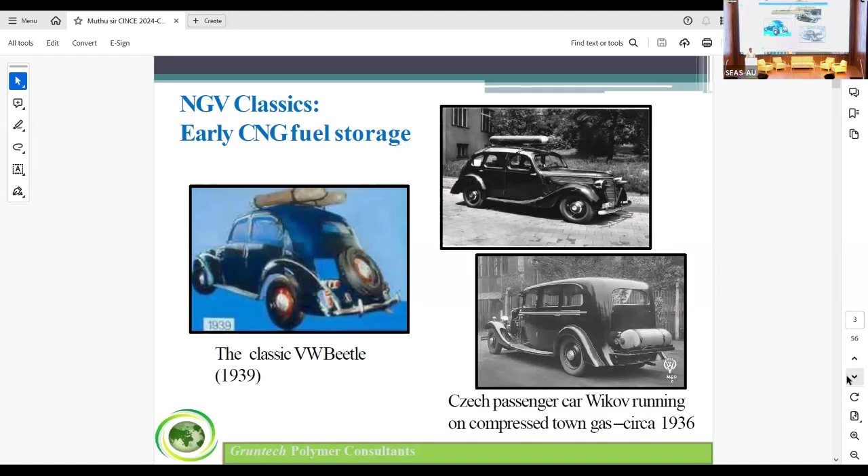So there are 5 types of hydrogen storage, like for LPG, or even for CNG and hydrogen. Type 1 and type 2, you are all aware of. Type 1 is completely metal, a metal body. Type 2 cylinders are metal with a hoop, circumferential wrap on the middle part, with carbon or glass fiber. Type 3 has an aluminum or steel liner based on your design requirements, fully wrapped with carbon fiber, or you can use glass fiber on top of it.

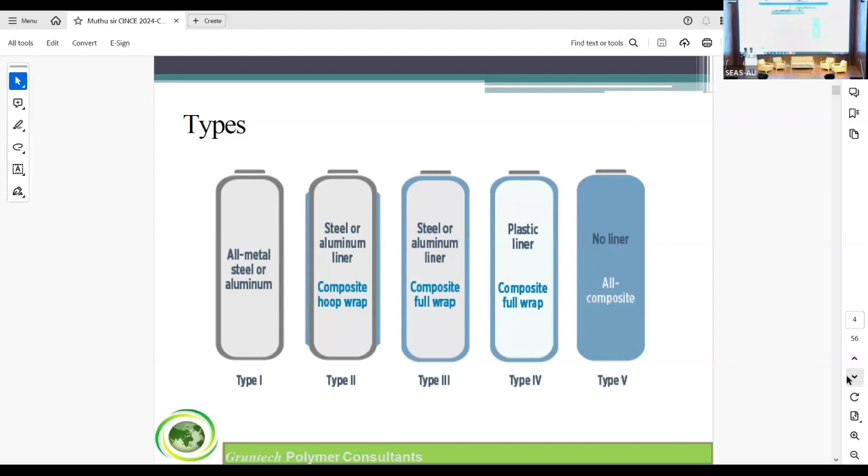Type 4 is a plastic liner. It can be high density polyethylene; at the moment, everybody is using it. Nylon for hydrogen applications. There are other engineering plastics also that can find their way into the type 4 segment in the coming months. The last one is type 5, no liner, all composites. It's in the early stage, only a few prototypes, and it's coming into the market. But as of now, type 3 and type 4 are dominating the composite market in the hydrogen segment.

So carbon fiber. Why carbon fiber? We tried with glass fiber and basalt fiber, but the thickness goes up, the weight goes up, and it does pass the burst test and hydrostatic test, but in fatigue we fail. So that's the reason we moved to carbon fiber. Carbon fiber's main properties you are all well aware of, since you are from the composite industry.

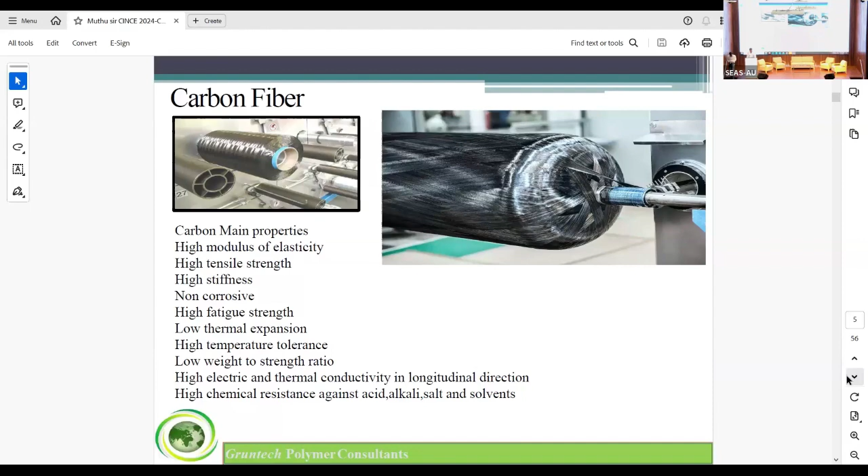High modulus of elasticity, high tensile strength, high stiffness, non-corrosive, high fatigue strength, low thermal expansion, high temperature tolerance, low weight to strength ratio, high electric and thermal conductivity in the longitudinal direction, high chemical resistance against acid, alkali, salt, and solvents. So with carbon fiber, we look at 2 main properties when you choose whether Toray or Hyosung: tensile strength as well as modulus. Toray and Hyosung are leading players.

If you start a project next year, you have to book your orders now itself, because the demand is more but supply is less. From Toray, you have to wait 1.5 to 2 years to get at least 1 ton or 2 tons of carbon fiber minimum. With Hyosung, you can wait 6 to 10 months and get a sizable amount for prototype making.

Leading players in type 4; type 3 is a mix of both. These are the companies leading: NPROXX, Faurecia, Plastic Omnium, Steelhead, Quantum Fuel Systems, Time Technoplast from India, Toyoda Gosei, and for LPG, Supreme, which you can add for LPG cylinders.

So some people use 50% carbon fiber and 50% glass fiber ratios for the winding. Whereas based on the design, some are not able to attain all the test requirements. That is why the majority portion is covered with carbon fiber in type 3 and type 4.

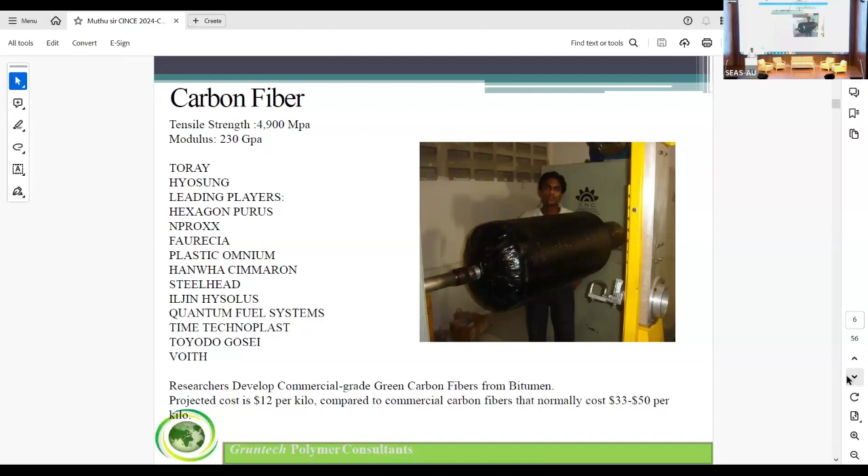These are the tanks we wound, almost 15 years back. So this is a key advantage of composite cylinders: cylinders made of composites have lower weight compared to conventional cylinders. As you know, these cylinders are external corrosion resistant. Still, with certain chemicals you need to be careful. Still there is corrosion taking place for composites, which we discuss in later stages.

Suitable additives can impart very good fire retardant properties in a composite cylinder. It's very, very much needed. Some researchers, some companies straight away go with the market-available epoxy resins. They add whatever flame retardants are available in the market, and then they're not able to get a consistent performance on the fatigue test and the bonfire test.

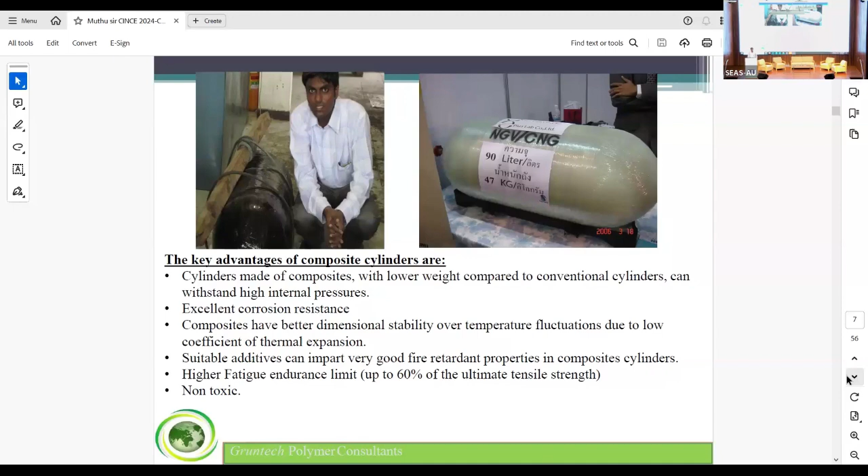So higher fatigue endurance limit, up to 60% of ultimate strength. It's non-toxic. Weight ratio: Type 1 is 1.2 to 1.5 kg per liter. Type 2, 0.7 to 1.4 kg per liter. Type 3, 0.3 to 0.4, based on whether you add glass fibers. If you use 90% carbon fiber and, for better impact strength, you add a top layer of glass fiber, for that the weight varies.

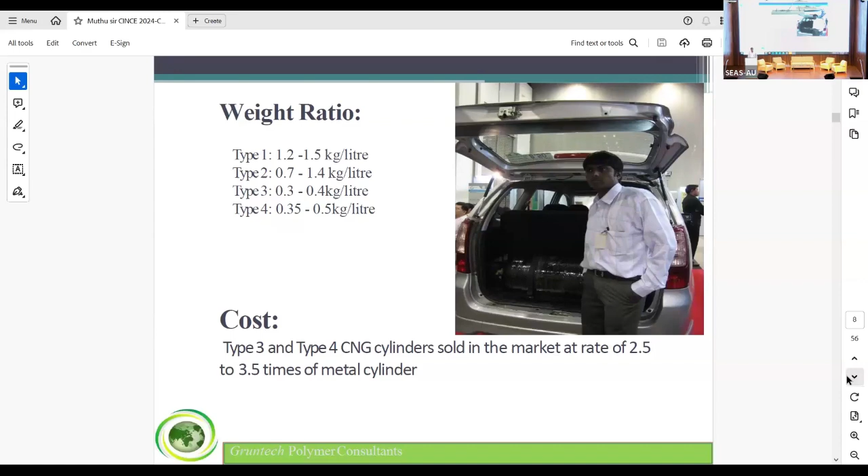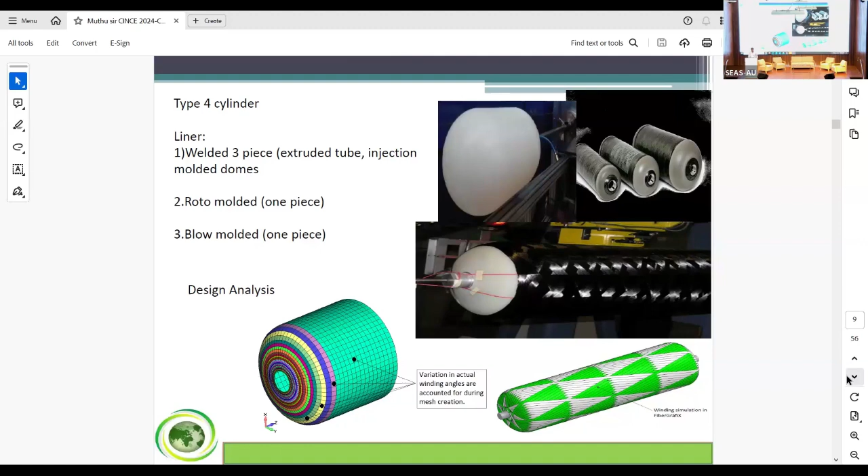Generally for the liner, there are 3 types. Straight away we can go with blow molded or roto molded, a one-piece single molded liner. Otherwise, welded three-piece: one extruded tube and injection molded domes. That also can be used; Hexagon started using that. For now, for hydrogen, the majority of companies are going for blow molded one-piece liners, mostly polyamide nylon.

When you look at the hydrogen storage system, you need to have very good machines. Before that, you need to decide which resin system you're going to use and what additives you're going to add. If you want nanomaterials, you can use that also. It's based on your design. So you have to be pretty strong in the design before placing orders for the machines and other supporting equipment, fibers and resins.

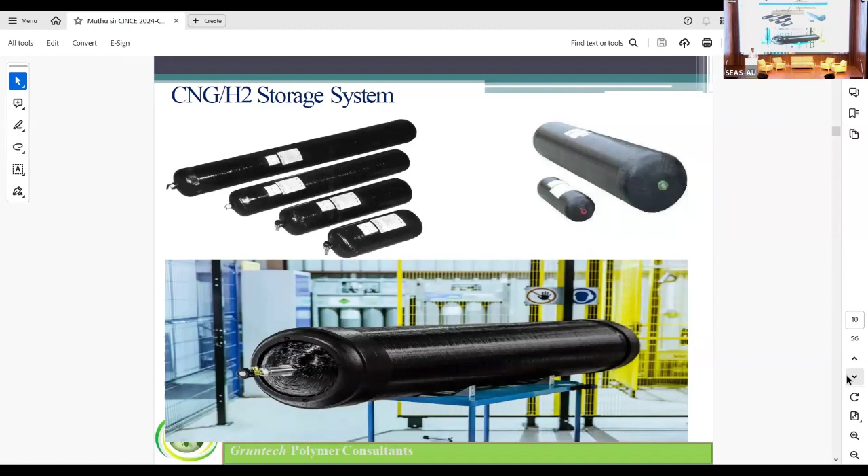So there are metal cylinder accidents. A wrong component fitted, even to good cylinders. One technician asked me, shall I put an LPG kit valve on the CNG? Even in one of our trials in Thailand, our technician fitted the valve too tightly, so the pressure release device didn't work when we did a bonfire test. It burst on the other side.

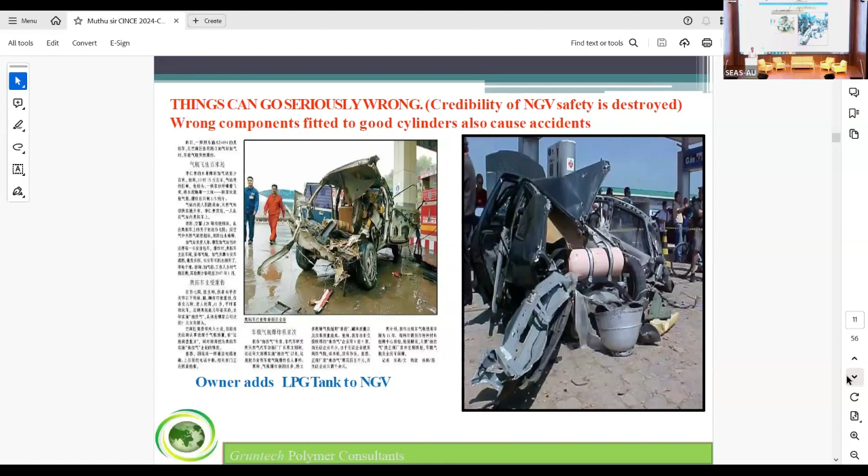That was in front of all the scientists and Thai authorities. We had done a lot of tests, and then we failed it. Then again, with the help of Thai army personnel, we did the bonfire and bullet penetration test and we passed it. So failure doesn't mean anything bad; you are learning and providing better solutions, a better product to the market.

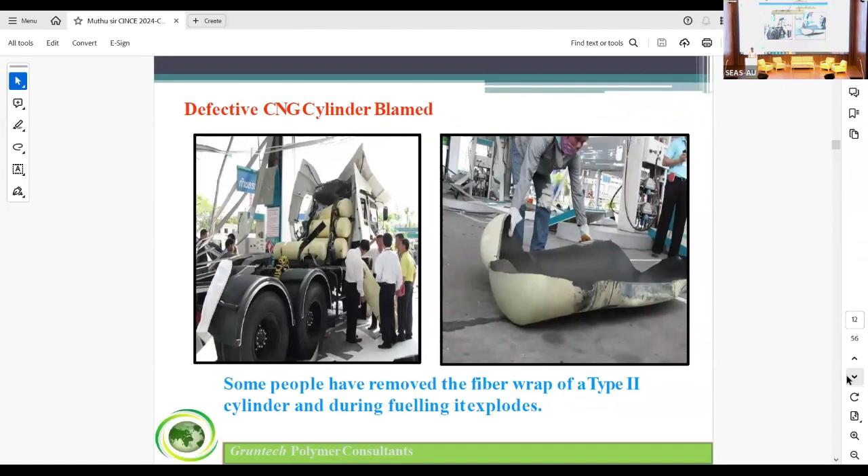Some people, I said, removed the fiber wrap. Even with Type 2, they removed the middle portion; some portions peeled off, so they removed them and used it. It will not last in the long run. With cylinders, whether metal or composite, the first couple of years you will not have any issues at all, because the design and consistency will be there. But after a couple of years it shows its true color.

So your design has to keep in mind that your composite cylinder is going to work for 20 years. Based on that, you have to work. You have to add UV protection. So what will happen with UV?

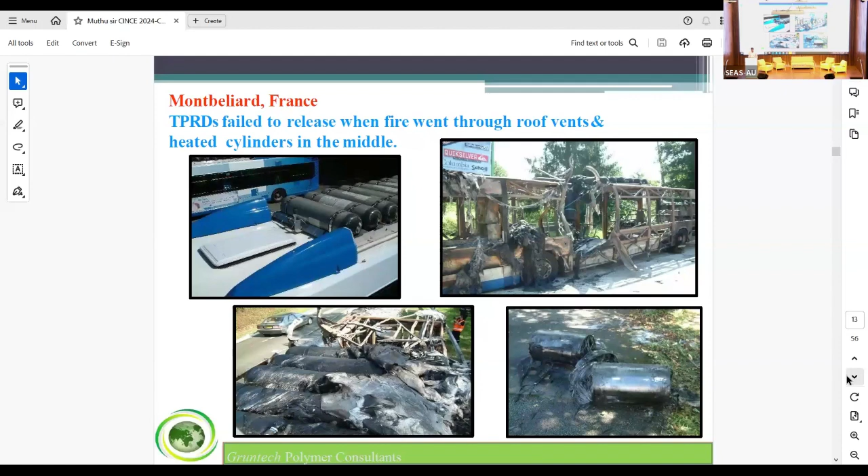So what you have to add are UV additives, flame retardants. So all the other parameters in additives, while selecting the additives, you have to consider.

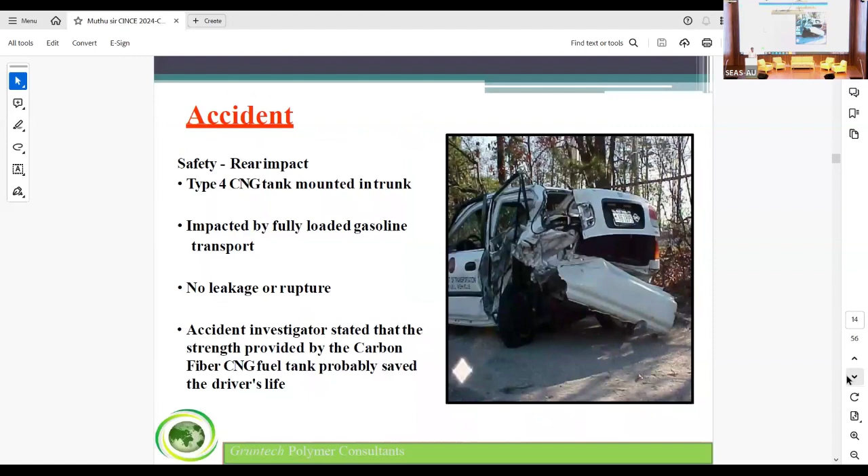Accident: the CNG tanks in the accident are mounted in the trunk. So fully no leakage or rupture. Accident investigators stated that the strength provided by the carbon fiber CNG tank probably saved the driver's life. So use and consumption of composite type 4 cylinders.

So the plastic, some people say, plastic permeation. Permeation, all the materials do have permeation. There is a limit for all the permeation. If your cylinder liner passed that permeation level, you don't have to worry about that for approvals and other compliance.

Plastic material on permeation. Like 10 years back they said composite is not for Indian roads, uneven roads, so only type 3 will work out. Now you can see type 4 is accepted on Indian roads. Confusion over type 3, type 4, both are good. I'm not saying metal is bad, type 3 is bad or type 4. Each one has its own advantages and disadvantages.

If you're using it for a car, you can use type 3, type 4. If you go for longer, carrying the transportation gases to mother stations to daughter stations, the distribution network, if you're using long storage systems, type 4 is more advantageous.

And the properties of composite are not well known. Only after LPG cylinders came to the Indian market, people started saying okay, we can go with LPG itself. We are seeing it's a good result. So type 4 for CNG and hydrogen will be accepted by the people. Already type 4 is accepted, but since the topic is on hydrogen, I want to make sure what is happening at the LPG and CNG level. If you understand that, then only the hydrogen sector.

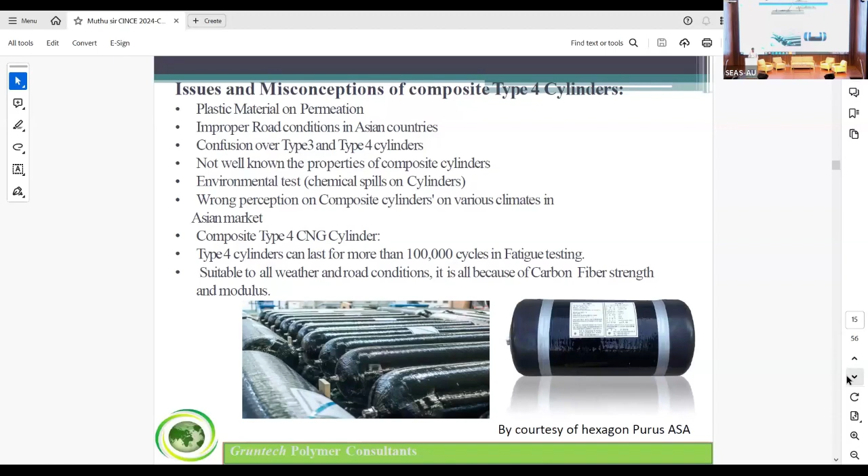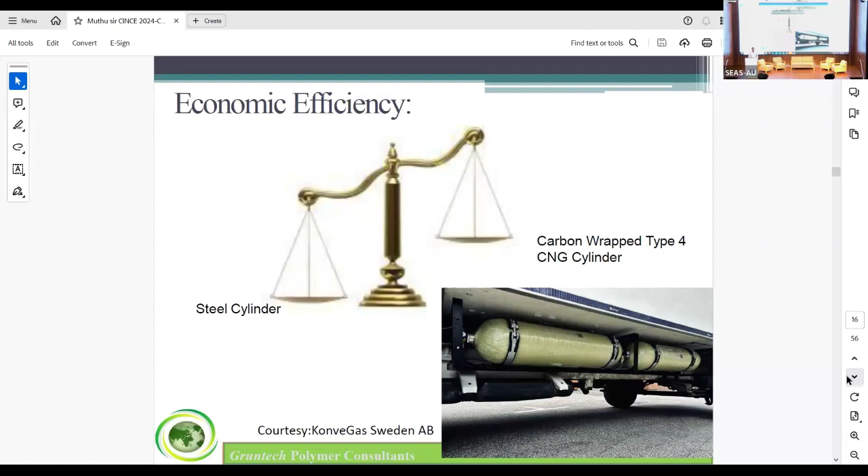So economic efficiency: this is Sweden-based cylinders, they use glass fiber. For CNG application, you can use glass fiber on top of it. If you use fully wrapped glass fiber, it will also work out. But in the fatigue test, like 45,000 cycles, you need to pass. Normally type 4 goes more than 1 lakh cycles. So even 20, 25, 30 years, the performance will be there from type 4. It has been accepted in aviation and maritime.

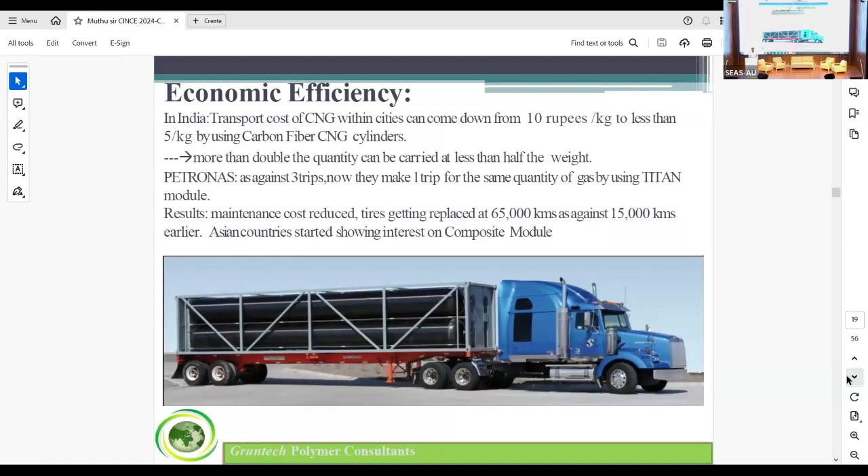This is a huge Titan tank from Hexagon Purus. In India, transport cost of CNG within cities can come down from 10 rupees per kg to less than 5 by using carbon fiber CNG tanks. More than double the quantity can be carried at less than half the weight. Petronas in Malaysia, as against 3 trips now, make one trip for the same quantity of gas using the Titan module, compared to metal cylinders. As a result, Asian countries have started showing interest in composites.

In a bus, a steel tank is 1000 kg, Type 4 is 300 kg; you can see the difference, 70% with carbon fiber Type 4 cylinders. Some people use helical winding with carbon fiber and circumferential winding with glass fiber, then the weight goes up, and you should not compare that data with this data. I'm talking about carbon fiber tanks here, not glass fiber tanks.

To deliver a customer 1 kg of CNG, the steel trailer must also deliver 6.6 kg of steel, whereas in composite it comes to 1.47 kg only. To make a hydrogen storage tank, approximately, it goes from 9.5 to 12 kg of carbon fiber per 1 kg holding. To have 1 kg of hydrogen storage in your tank, you need at least 10 kg of carbon fiber.

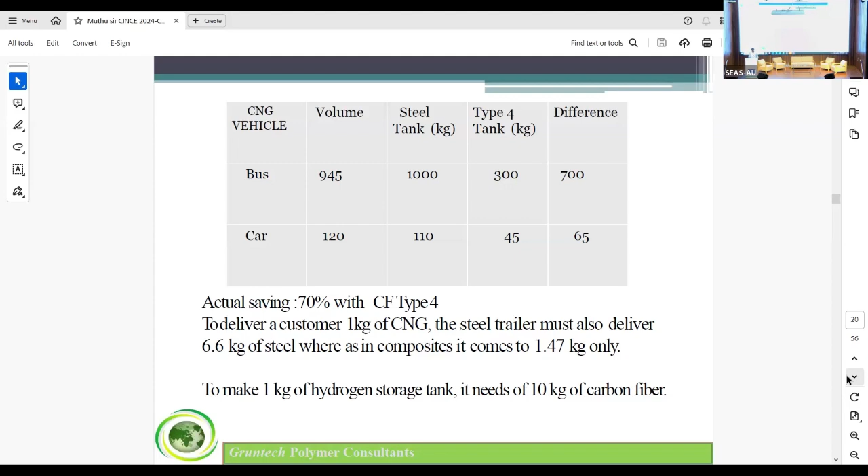In North America, 90% of buses run on Hexagon Composites Type 4 cylinders. How Hexagon started: they started with LPG, succeeded in the North American and European markets, and then started penetrating the Asian market.

Like 20 years back itself, they approached Ashok Leyland. During that time, when we had a meeting with the Indian players, I met the team over there. For this kind of market penetration, you need a very good marketing team. You may have very good technology, very good machinery, a very good product in your company, but if you're not able to take it to the OEMs, to the government tenders, to the various market segments... I know a couple of companies that still have very good, world-class tanks, but they are not able to penetrate into the market.

You need to spend a lot of money on marketing, by having regular follow-up meetings with government officials and OEMs, and then taking part in expos. You need to spread that. You are not only doing passenger cars; even distribution cylinders, trailers, you need to build up one by one, continuously. Then only you can stand in the market. Investing a couple of crores, making one tank, and then waiting for the orders, nothing will come.

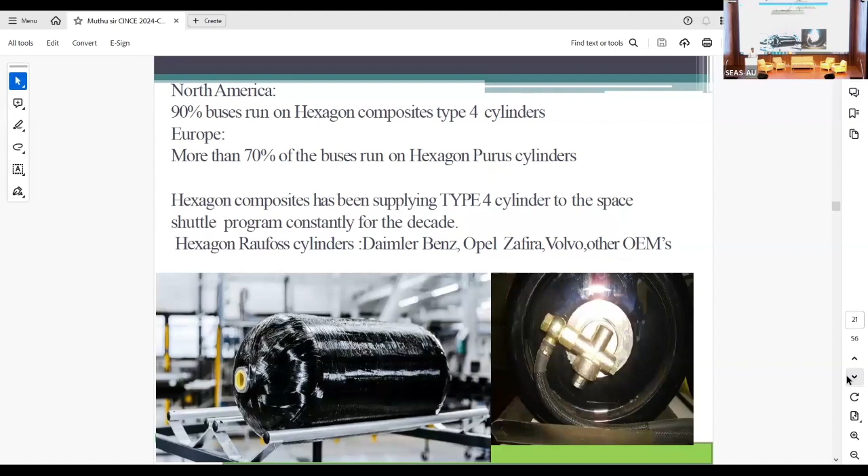They're going with prototype development. They are dominating the market as of now, not only LPG, CNG. They went first into Malaysia, Vietnam, Thailand, Kazakhstan, India, and China, and they're already in service in all these countries. These are Titan. You can see the 10,000 cubic meter capacity of CNG. Titan 5 Magnum, 13,250 cubic meters of CNG at 3,600 PSI. So you can imagine, we start with 60 liters, then 120 liters, and then 180 or 250. You need to have proper planning before entering this segment.

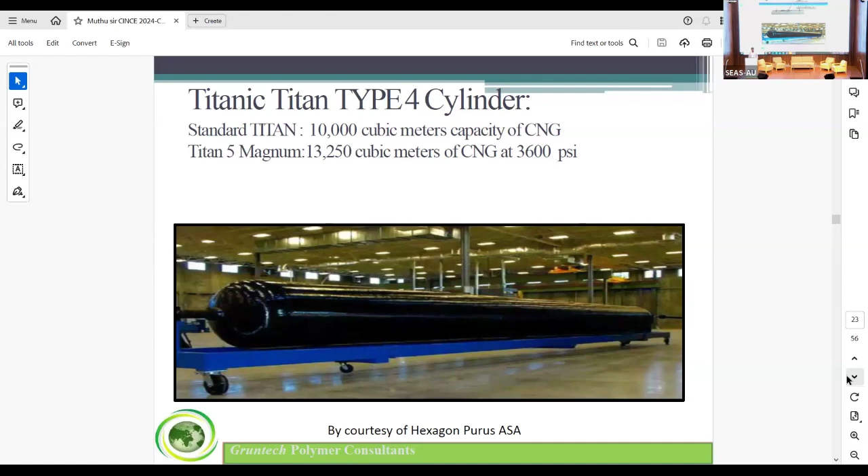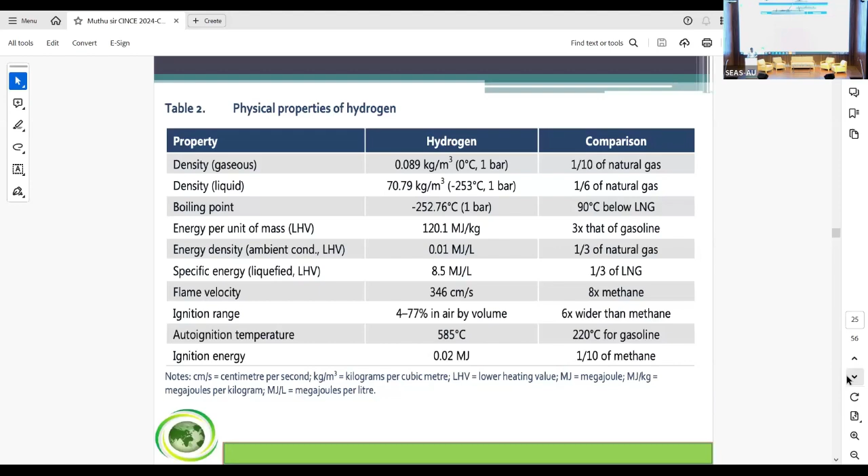Now coming to hydrogen. What is hydrogen? You can see the physical properties of hydrogen: density, boiling point, and the flame velocity, which is very important, 8 times methane. You will see the comparison. Then auto ignition temperature, and ignition range of 4 to 77%. That is a very important criterion to keep in mind. On permeation leakage, a very important point I want to share with you: hydrogen is the lightest element. It is highly volatile, escapes immediately and disperses rapidly before it forms a flammable concentration.

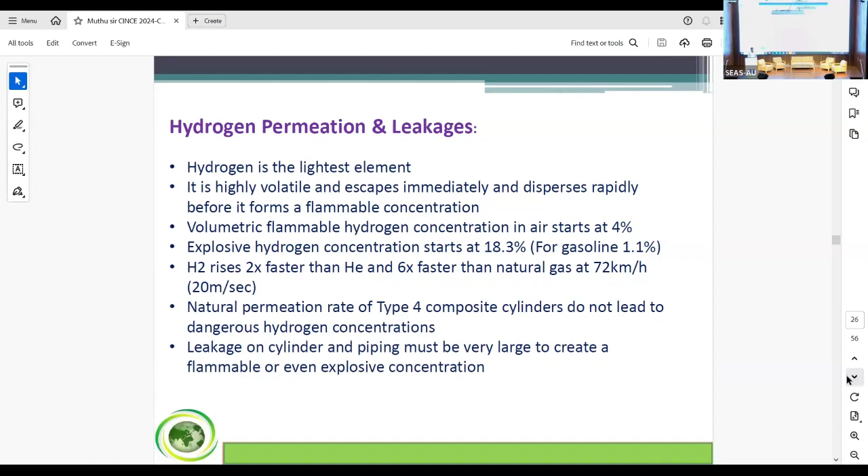Volumetric flammable hydrogen concentration in air starts at 4%. Explosive hydrogen concentration starts at 18.3%; for gasoline, 1.1%. Hydrogen rises 2 times faster than helium and 6 times faster than natural gas, at 72 kilometers per hour, 20 meters per second. You can imagine how hydrogen behaves and reacts to flame. Natural permeation of composite cylinders does not lead to dangerous hydrogen concentration. Leakage on the cylinder and piping must be very large to create a flammable or even explosive concentration.

For hydrogen, at the moment, there is blue and gray, and brown, as you can see. Green is at the investment stage. Germany is making it, and China has started making it. These are already established, with 600 tons per year facilities now, and it goes higher. India has already announced projects, and they're in the pipeline, so you can expect a lot. White and pink are electrolysis and nuclear. We only have a market in gray, and this is from natural gas resources.

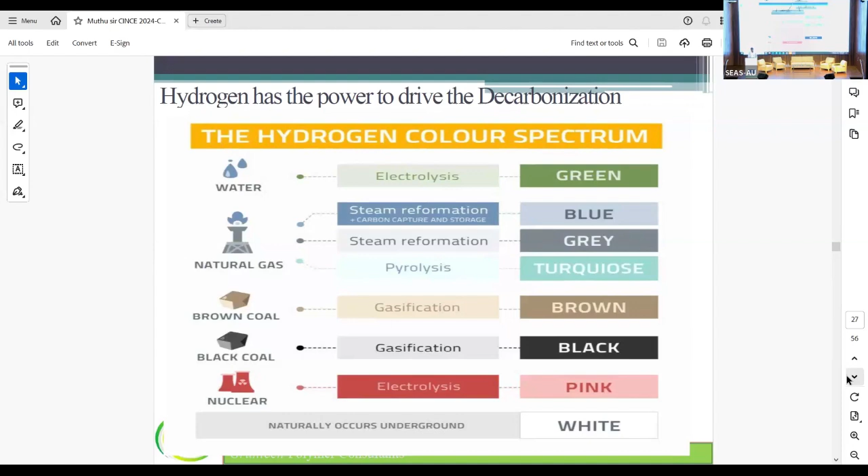And brown, green is under pipeline. So a lot of projects are taking place in green. So green energy, hydrogen. So more in applications-wise, chemical, fertilizer, oil, steel, cement industry. So that we can cover in the next slides.

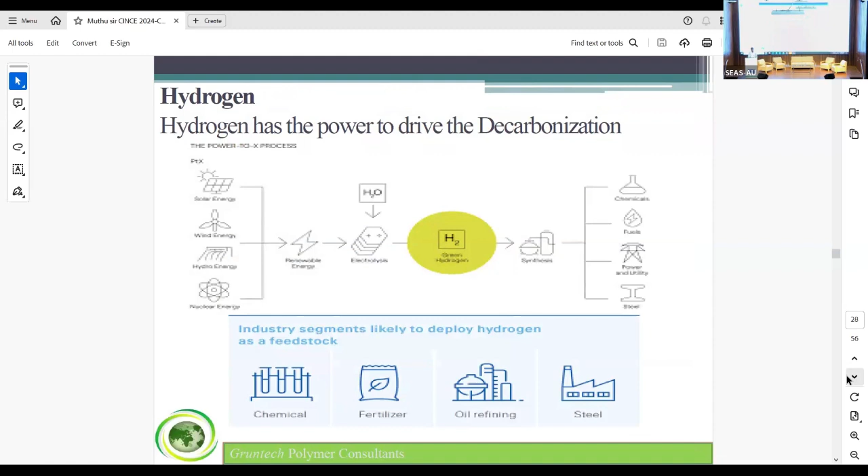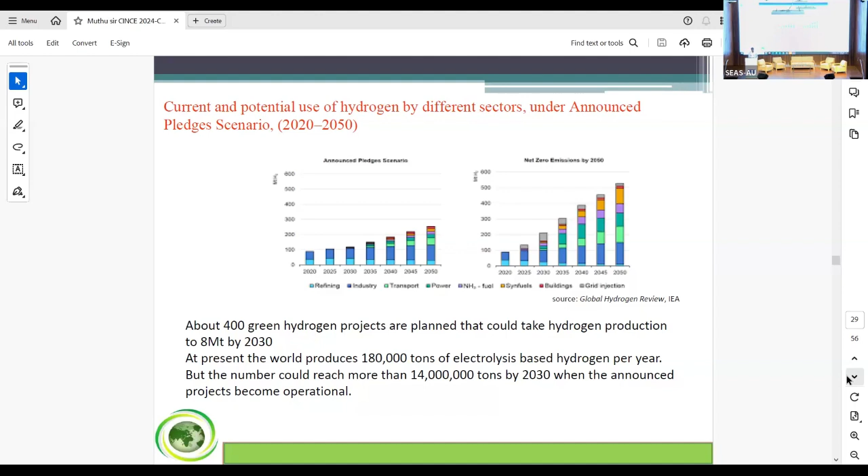I think it may go higher also. This figure is just the present scenario. We assume this one. It will reach beyond. It will surpass the number. So if all the announced projects and undergoing projects take place, it will be 14 million tons.

So hydrogen studies suggest that long-haul trucks and buses have greater potential for fuel cells compared to other modes of transport. 25 major auto manufacturers are currently deploying fuel cell electric vehicles in target markets such as the US, mainly California, Germany, UK, and Scandinavian countries, Norway and Sweden. They're dominating the market, and Japan.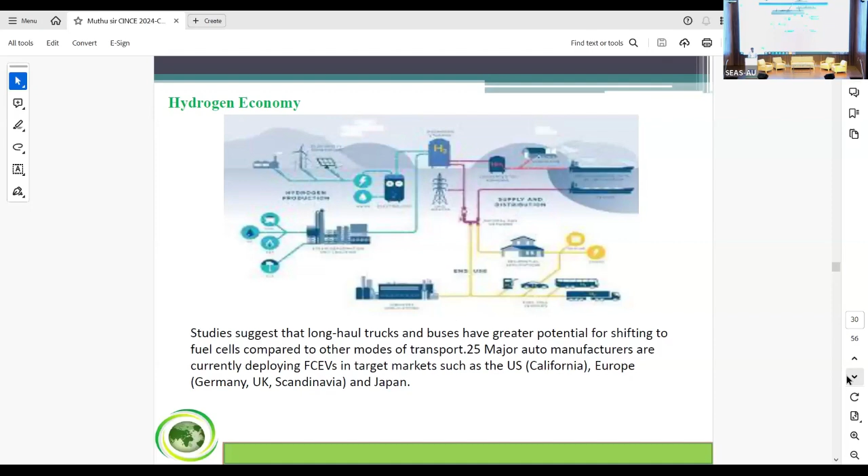Mitigating risk in the hydrogen value chain. Exposure caused by hydrogen's unique properties. Hydrogen has unique features that make it complex to de-risk. Although it is widely recognized as a valuable energy carrier, it has not yet been used as a fuel at scale. The severity and frequency of damage arising from failures in delivery infrastructure depend, among other things, on the type of materials involved and the extent to which the gas has been blended with other materials.

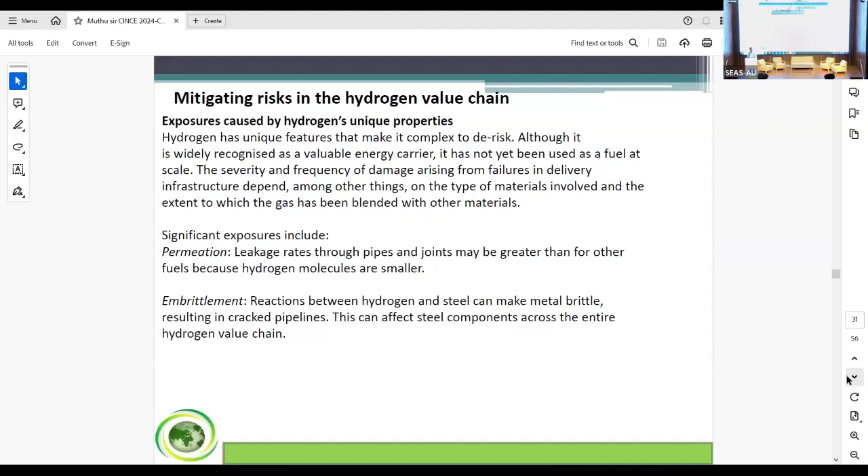Significant exposure modes include these: leakage rates through pipes and joints may be greater than other fuels, because hydrogen molecules are smaller. Embrittlement, this is very important, reactions between hydrogen and steel can make metal brittle. So this point you have to keep in mind when you prepare pipelines or type 3 cylinders. Even Airbus will be using it in Type 4 cylinders also, resulting in cracked pipelines. This can affect steel components across the entire hydrogen value chain.

And hydrogen-assisted fatigue: frequent fluctuation in pressure in transmission or distribution pipes can reduce the threshold cyclic stress intensity factor and expose pipes to accelerated fatigue cracking, especially in carbon and low-alloy steel applications. And enhanced crack growth from existing defects: crack growth can be exacerbated by introducing hydrogen due to reduced ductility of steel. Blistering and damage of carbon fiber.

This is another very important point. So, some valves used to release pressure in the event of high temperature use carbon fibers. Some of these fibers develop blisters that can cause damage when exposed to hydrogen. So this point you have to keep in mind when you deal with the carbon fibers. Hydrogen has the power to drive decarbonization.

New sources of demand. Using information from different sources, we anticipate that demand for hydrogen from various sectors will come in phases. In the short term, like 2025 to 2030, demand will mainly come from industries that use hydrogen as feedstock, such as chemicals, fertilizers, oil refining and steel. In the medium to long term, like 2030 to 2040, the increased interest in hydrogen as an energy carrier will broaden into use cases such as hydrogen power stations and transport.

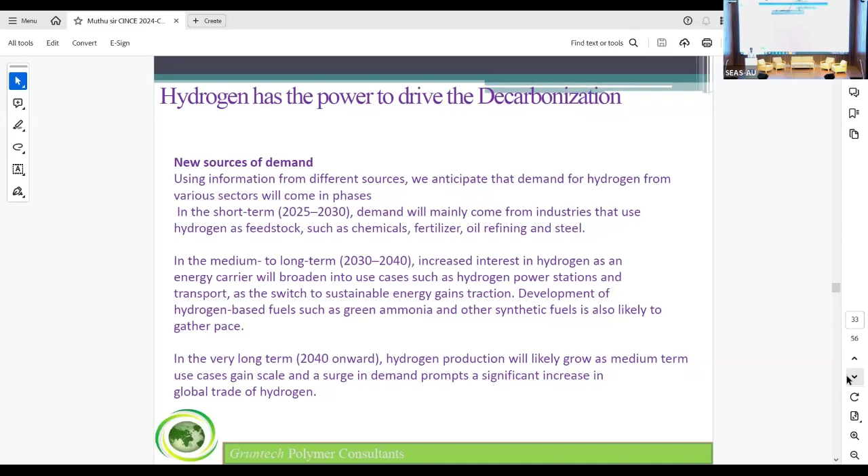As the switch to sustainability gains traction, development of hydrogen-based fuels such as green ammonia and other synthetic fuels is likely to gather pace. So hydrogen is a feedstock if you produce methanol, green methanol, or green ammonia. So hydrogen is going to play a key role. In the very long term, 2040 onward, hydrogen production will likely grow as medium-term use cases gain scale, and a surge in demand prompts a significant increase in global trade of hydrogen.

So, fuel cell technology for trains benefits. These are key benefits. Reduction of greenhouse gas emissions. So you can see how much reduction per train. That is minus 700 tons of carbon dioxide per year using hydrogen as a fuel. That equals the annual emissions of 400 cars.

That's the reduction per train. Reduction per fleet, 30 trains in a fleet. Okay, so 22,000 tons of carbon dioxide can be reduced. So it can be saved. That equals the annual emissions of 12,000 cars.

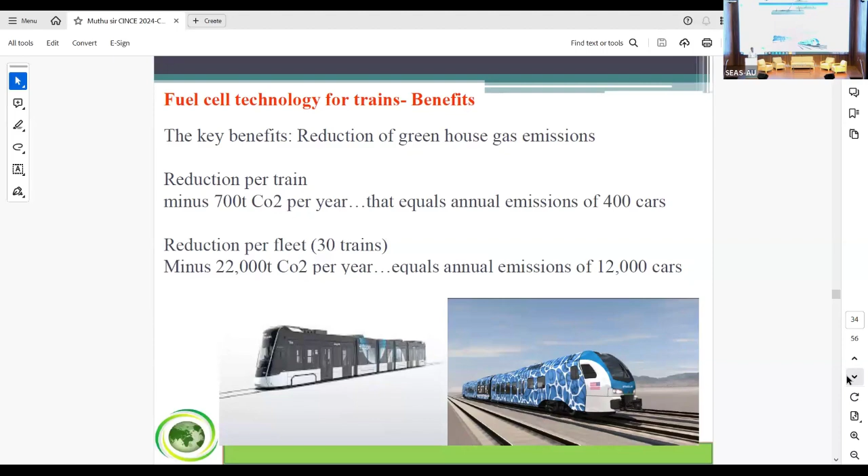Right, and the global shipping industry is under increasing pressure with growing scrutiny from customers looking to decarbonize their entire supply chains and increasing regulations. The industry needs to find cleaner fuel solutions fast. While these are important milestones for the maritime industry, much more needs to be done to decarbonize an industry that is responsible for 3% of global greenhouse gas emissions.

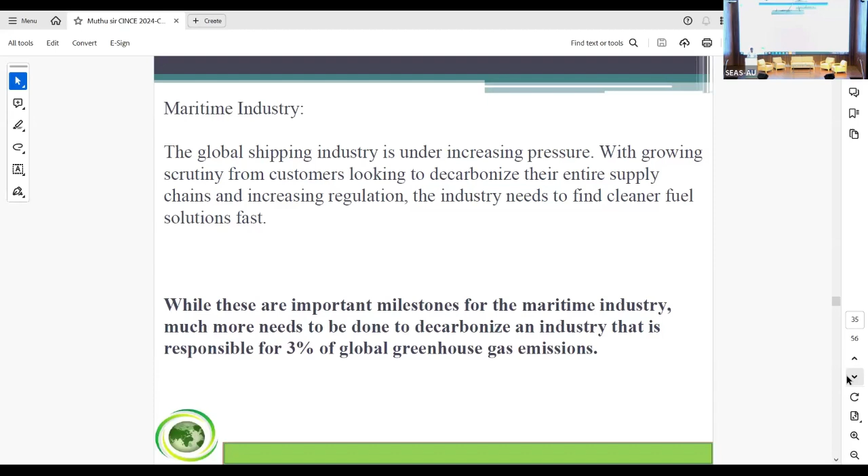Responsible for 3% of global greenhouse gas emissions. So this way, the hydrogen economy is going to play its role.

Current scenario of hydrogen investment worldwide: scale of battery electric vehicles in 2022 versus fuel cell electric vehicles at 20,000. So the ratio you can see is 400 to 1. And the same way if you look at 2023, battery electric vehicles rose to 13 million.

So you know this very well. A lot of companies are accepting this, including India. You can see a lot on the road. Chinese companies are completely dominating the market worldwide. In fuel cell vehicles, only 14,000. So a lot of investments are taking place.

The availability of hydrogen stations and infrastructure expenses, and carrying the gas from one place to other places - the slowdown is taking place. You can see like in 2026 onwards, the numbers will be a couple of times higher.

So $500 billion is the approximate value, it has reached 600 billion. I'm just roughly putting this - $500 billion value hydrogen projects announced, but only 5% have passed FID.

Almost all oil and gas companies made huge profits in 2022. Nothing was reinvested in hydrogen projects in 2022, but now oil companies are showing interest in green hydrogen and started investing heavily on green hydrogen production plant setup. So these changes are happening.

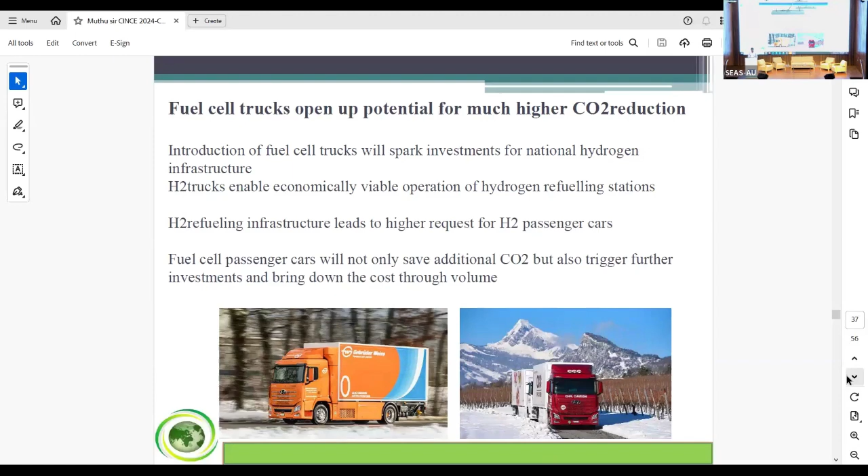Indian market for electric vehicles and fuel cell electric vehicles - I would like to say a couple of things. A lot of things are taking place. India must provide some leeway for the supply chain to mature within the country before restricting imports. It's important to realize that to compete internationally, global supply chains are crucial for success.

Tesla is very successful today because it managed to secure a $465 million loan from the American government in 2010 when it was struggling. So in 2010 when Tesla was struggling, they received a loan, the stimulus package. The federal government announced a $600 billion 2020 pandemic stimulus. The state of Nevada gave $1.3 billion in subsidies to build its battery factory for Tesla.

Tesla will benefit from setting up operations here in India because India is a major player in the global automotive industry with a turnover of over $120 billion, and recently overtook Germany in passenger vehicles to become the fourth largest in the world. Tesla's valuation is $240 billion in 2023.

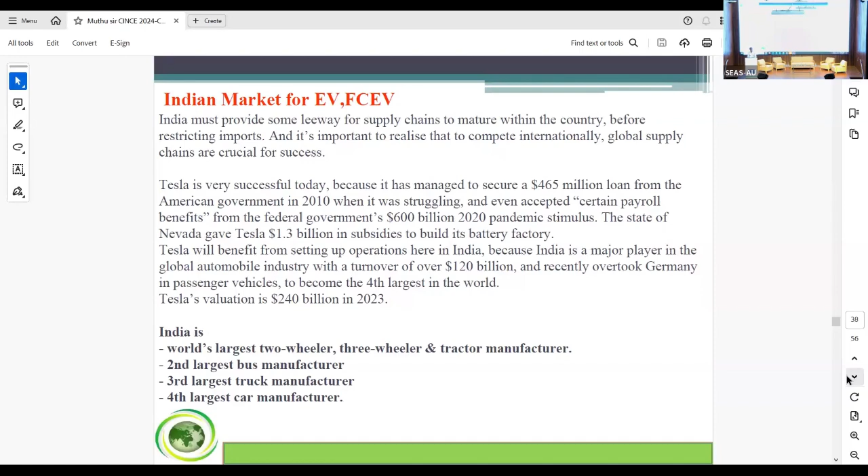India is the world's largest two-wheeler, three-wheeler and tractor manufacturer, second largest bus manufacturer, third largest truck manufacturer, and fourth largest car manufacturer. Looking at the Chinese market compared to India and the American market, why are they dominating, why are they able to open up a lot of projects, approvals and investments? So these are the reasons.

The Chinese government has handed out over $29 billion in financial subsidies to EV companies between 2009 and 2022 - over 13 years, $29 billion in subsidies. This has resulted in over 6.8 million EVs sold in China in 2022, and 679,000 vehicles were exported, making it the global leader. This is the reason - we need government support to stand out in the race globally.

These commitments must be part of the Indian government's agenda to spur domestic manufacturing, strengthen supply chains, boost Indian competitiveness, and create good paying jobs in the EV segment as well as fuel cell vehicles.

India has taken steps in its agenda to move from vehicles powered by imported polluting fossil fuels to electric vehicles powered by locally produced renewable green hydrogen, ammonia, and methanol. India can save over $100 billion in forex annually, and instead of making oil exporting countries rich, India can become rich. India is also a preferred destination as an R&D center for global automakers due to its acclaimed IT and engineering prowess based on frugal engineering.

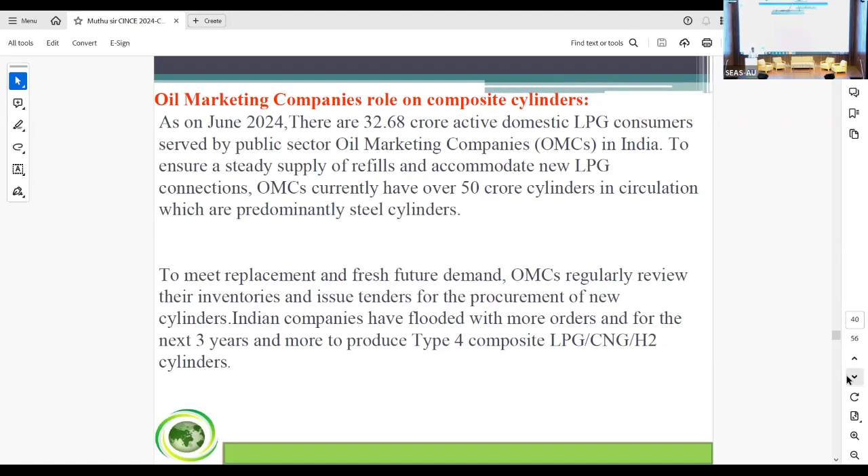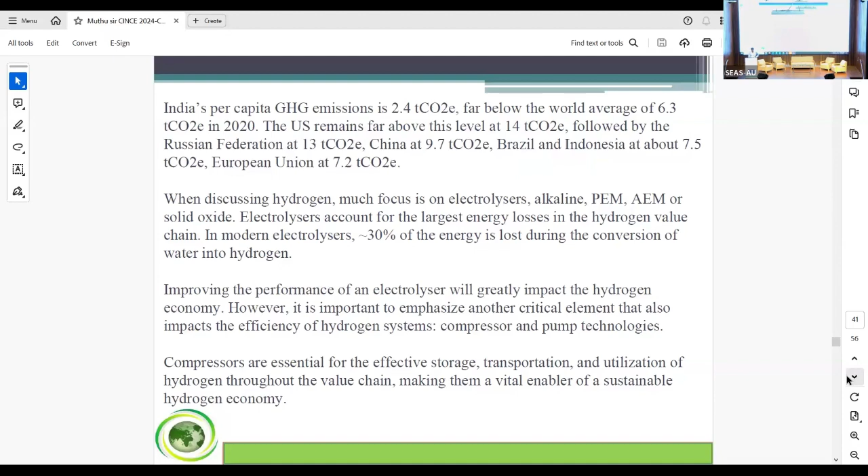India's per capita greenhouse gas emission is 2.4 tons of carbon dioxide. You can see the US at 14 tons, and then Russia and China one by one. So we are still less compared to other countries.

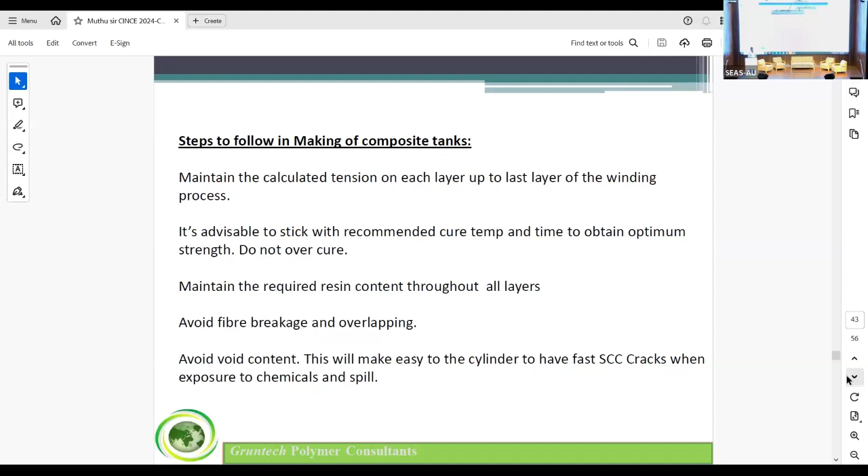Steps to making composite tanks: maintain the calculated tension on each layer up to the last layer of the winding process. It is advisable to stick with the recommended curing temperature and time to obtain optimum strength. Once your design is approved and frozen, you have to follow the same curing time and cycle time for everything. Maintain the required resin content throughout all layers. Avoid fiber breakage and overlapping, and avoid void content, as this will make the cylinder prone to fast stress corrosion cracking when exposed to chemicals and spills.

So these are the notified bodies for the Type 4 cylinders. You can approach them before you prepare the design, and approach them to have it tested.

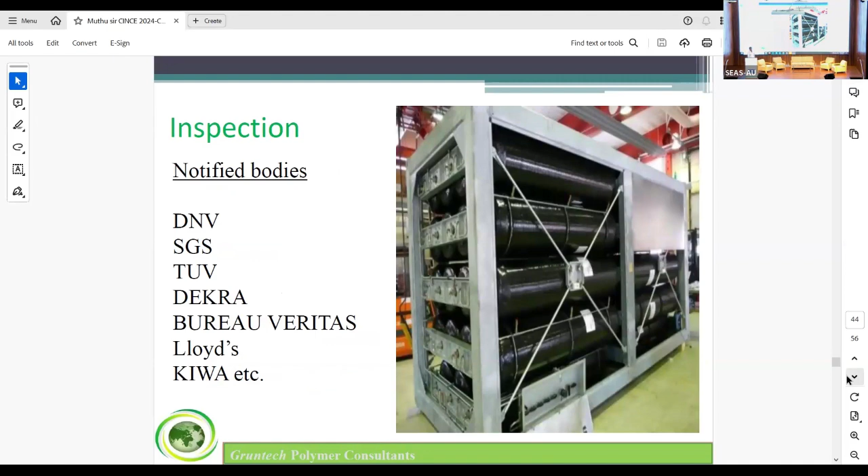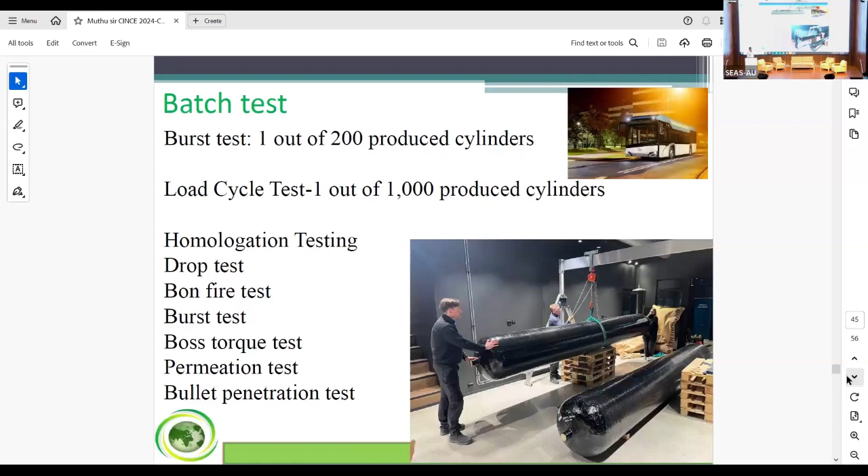Batch test: one out of 200 produced cylinders undergoes a burst test, where one cylinder from that batch is tested. A cyclic test, or fatigue test, takes 1 out of 1,000 produced cylinders, where one cylinder is taken away for testing. So homologation procedures include testing like drop test, bonfire test, burst test, torque test, permeation, and bullet penetration.

No compromise on machinery. Some machineries are cheaper, at one-third of the price, but don't go for that. Go with what the already established leading players in the market are using. Go with the initial proven way. Initially you should not take the risk of introducing a new product, new line, or new thermoplastic or band.

Go with approved designs and approved materials in the market, and after that your R&D team can introduce other things later. Regarding the end boss design versus a towpreg: if you go with the towpreg, the cost is 15 to 20% higher than the total cost of the cylinder, but uniformity and resin content will be maintained, so the performance will be there for a long time.

If you start development, it takes 8 to 10 months, and homologation another 9 to 12 months, along with production, end-of-line testing, batch testing, periodic inspection, and decommissioning. These are things you should not compromise on; you have to allot certain time for that. Wanting a time of just 2 or 3 months is not the way to approach this project. The approach should be proper, to pass all the tests.

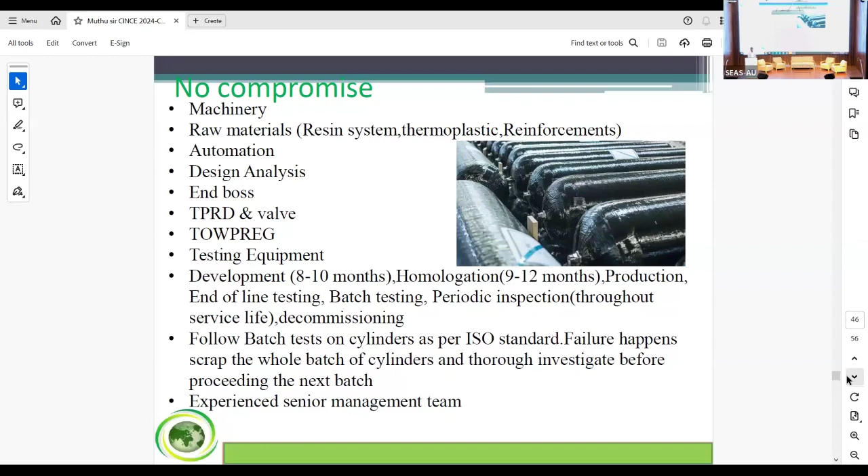Follow batch tests on cylinders, and as per ISO, if a failure happens, scrap the whole batch of cylinders and thoroughly investigate before proceeding to the next one. You need an experienced senior management team to run this. If just one manager is there with some unskilled laborers, that approach cannot work, and you will not be able to compete in the market.

These are electrolyser companies: Alkaline, PEM, SOFC - these are the leading companies. Climate actions include LED, solar, and electric vehicles.

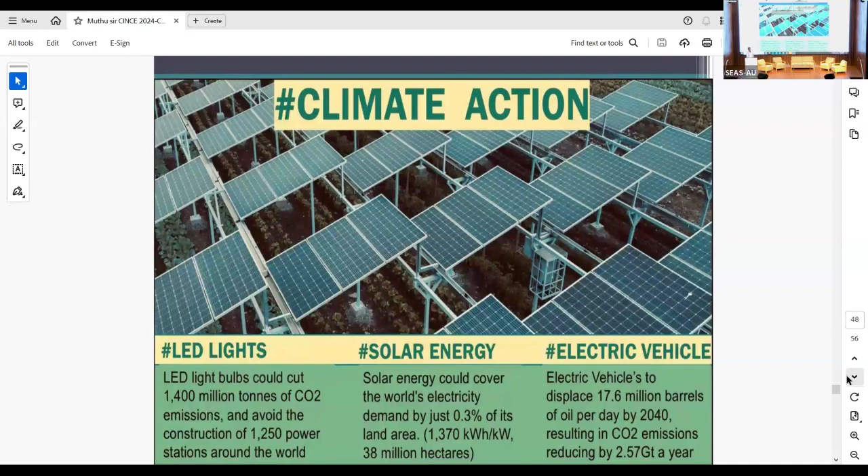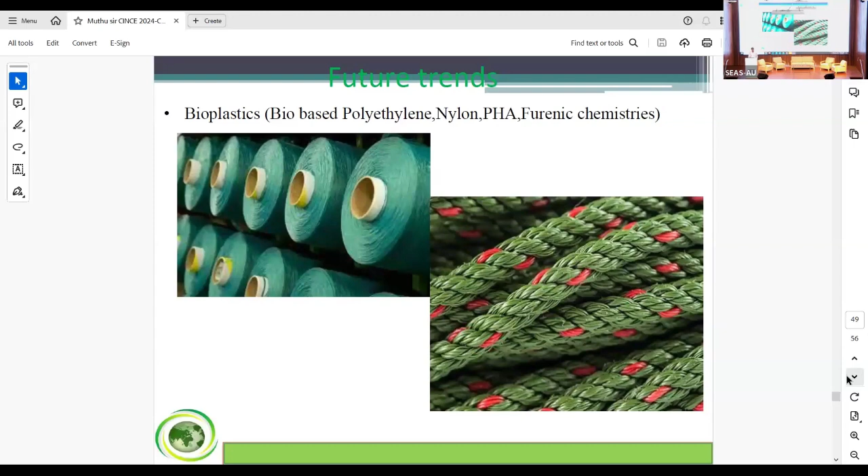Even carbon fiber, polyacrylonitrile based green projects - a lot of research is getting results coming into the market. So in the coming years, you can see a lot of price reduction in carbon fiber.

Equal service life of 30 years or more - previously only 20 years, now 30 years and more. Type 4 cylinders have about 3 times more payload due to lightweight and high pressure levels - 300, 380, 500, 635 bar versus 200, 250. LPG working pressure is 16 bar. CNG is 250 for vehicles, 200 for vehicle, 250 for distribution. For hydrogen, it's like 350, 700 for vehicles, and for distribution you can say 300, 380, 500, 650, 635 bar. For underground storage, it is in the 500 bar and 2000 bar range.

Lower carbon dioxide footprint of Type 4 cylinders and systems. An estimated 450 Type 4 cylinder systems have been brought into the market since 2012. So you can see, adoption-wise, Europe is leading the way, next North America, and next the Asia Pacific region.

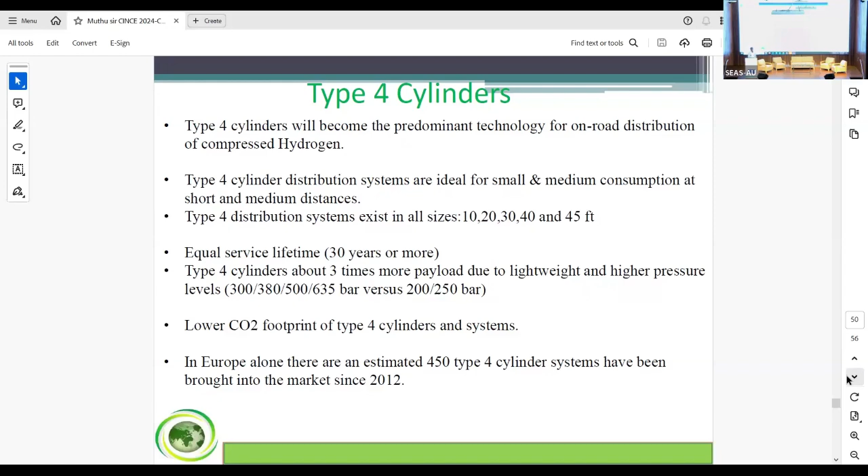Future trends: bioplastic, as I discussed, epoxy resin bio-based already exists. But for this application, you need to make formulations to meet all the demands and requirements. Expected milestone achievements: bio-based carbon fiber in the next 5 years, green hydrogen from biogas and wastewater, thermoplastic tape winding - this is another important segment - hybridization of fiber.

This is going to play a big role in Type 4 cylinders in the coming years. Additives for enhanced lifespan and better performance - this can include nanomaterials like flame retardants. In that segment, you can find a lot of options to give good performance to the cylinders.

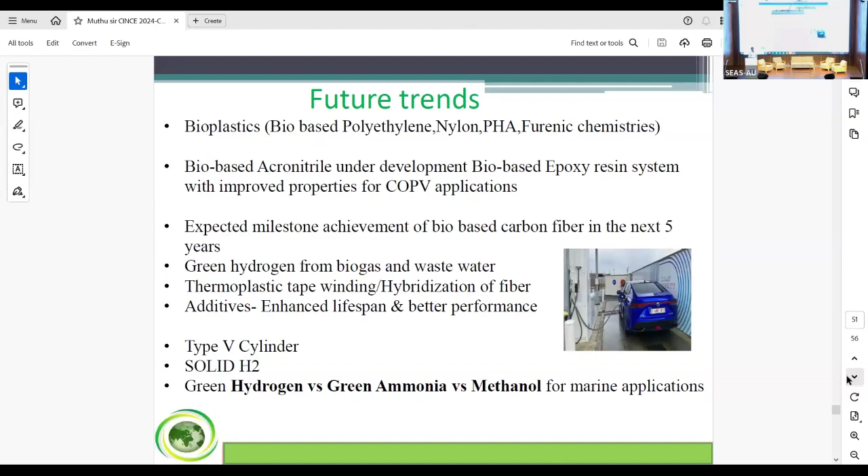Type 5 cylinders are under development stage. Some are in the market, but not yet for this application. Solid hydrogen is also an area where a lot of research is taking place, along with green hydrogen, green ammonia, and methanol.

Better understanding is needed to make a full-fledged hydrogen economy insurable, and the risk services industry needs to address several issues. The proposed blending of natural gas and hydrogen to ease transport is not well regulated - in some places they mix it based on their own interest. So that technology has not yet reached a mature stage, still under pipeline.

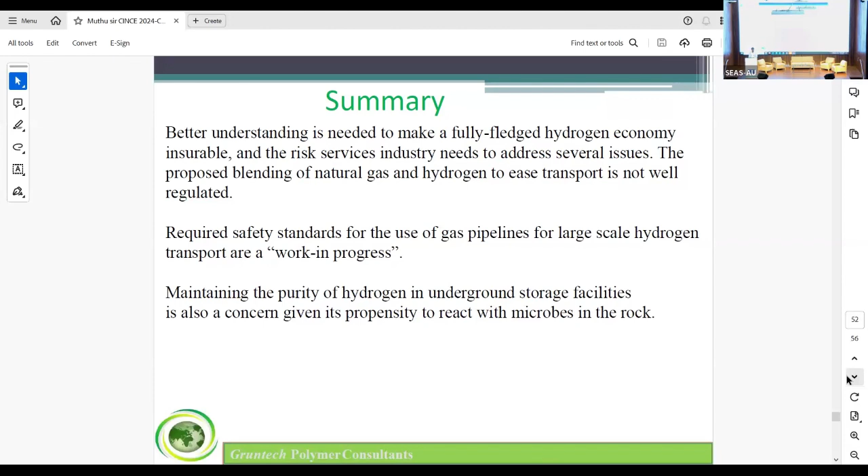It requires safety standards for the use of gas pipelines for large-scale hydrogen transport - this is work in progress. Maintaining purity of hydrogen in underground storage facilities is also a concern, given its propensity to react with microbes in the rock. So when you source hydrogen from underground, the microbes also react and change the properties and other things.

Summary: energy decarbonisation across multiple industries will be fueled by the hydrogen economy, in terms of safety and stringent regulations. So ultra-pure hydrogen - you have to make it. The hydrogen purity is very important in this; we have hydrogen gas, and the purity of the water is also very important.

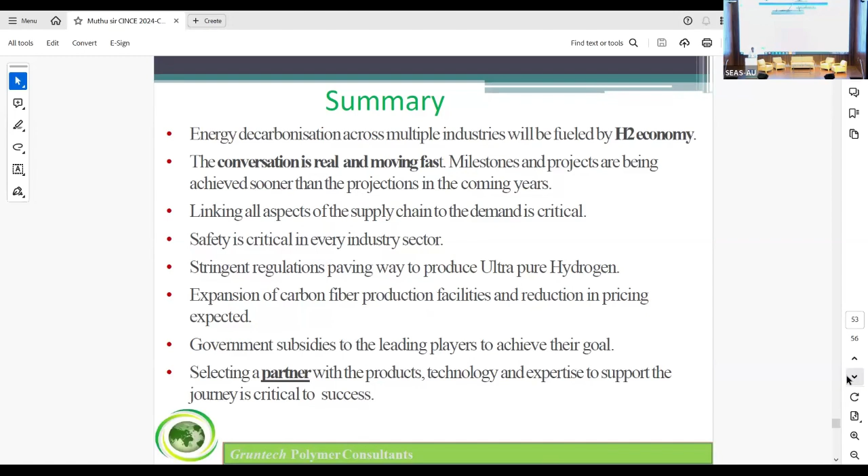Next, government subsidies to all the leading players to achieve their goals. Selecting the partners - you need to have partners whose technology expertise supports the journey - this is critical to success. Hydrogen has the potential to be a real game changer and will have a huge impact in the transition to clean and green energy. Thank you.